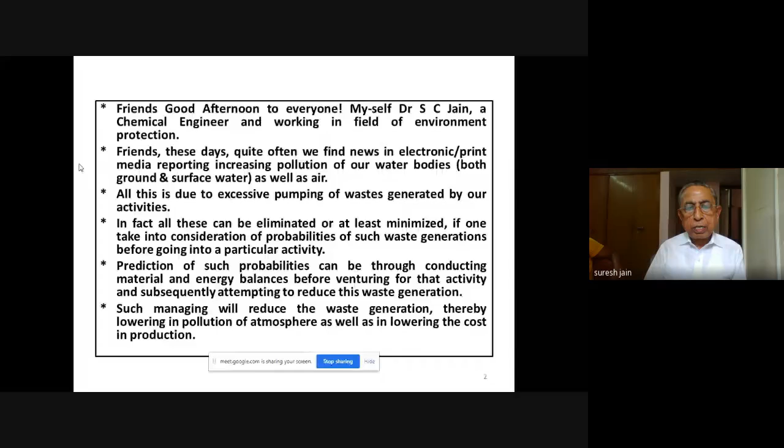Prediction of such probabilities can be done through conducting material and energy balances before venturing into that activity, and subsequently attempting to reduce waste generation. Such management will reduce waste generation, thereby lowering pollution of the atmosphere as well as lowering the cost of production.

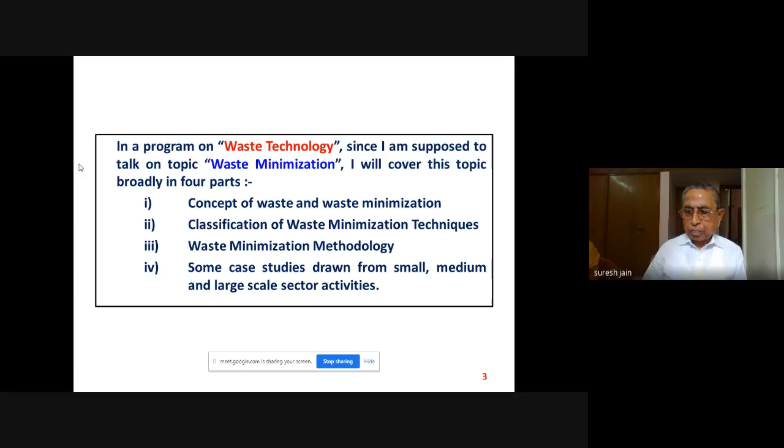In this program on waste technology, since I am supposed to talk on the topic of waste minimization, I will cover this topic broadly in 4 parts. First, I will brief you about the concept of waste and waste minimization. Then we'll discuss the classification of waste minimization techniques, followed by waste minimization methodology. To help you understand what we have discussed, I will discuss some case studies drawn from small, medium, and large scale sector activities. So some case histories I will mention.

Every year, millions of tons of waste is generated from both households and building construction, most of which ends up in landfills, with only a small percentage being recycled. Thus, there is a great need for waste minimization, as this will not only have a huge environmental impact, but also present substantial economic and social benefits.

Waste minimization entails limiting the amount of waste that is generated, thereby helping to eliminate the production of persistent and harmful waste effectively, supporting efforts that promote a sustainable society. So waste minimization involves a change of societal patterns relating to production and consumption, as well as redesigning products to eliminate the generation of waste.

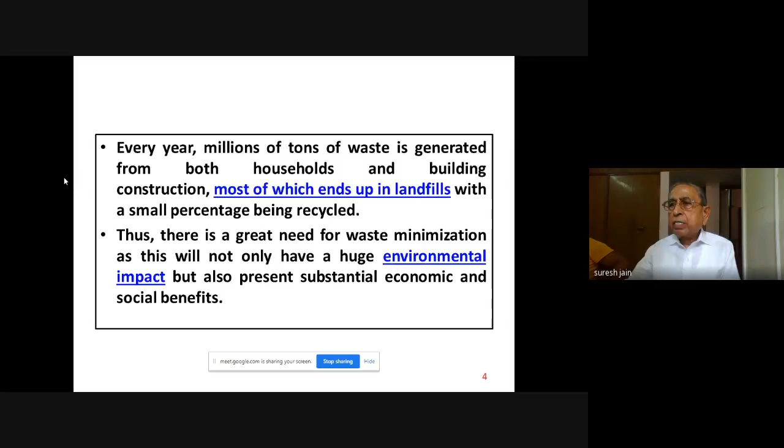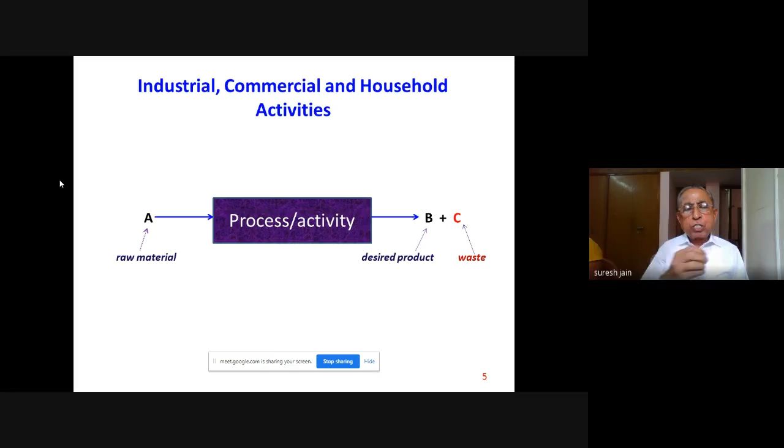Now think of dyeing a cloth - some color comes on your fabric, the remaining goes in a drain. You recover sand gravel from a river bed - some dust comes to your nostril, that is waste. When you burn coal, some smoke comes, that is your waste. Some effluent gases go, they are waste. So waste is something which is going out of this activity - a production activity, construction activity, agriculture activity, whatever activity you think of.

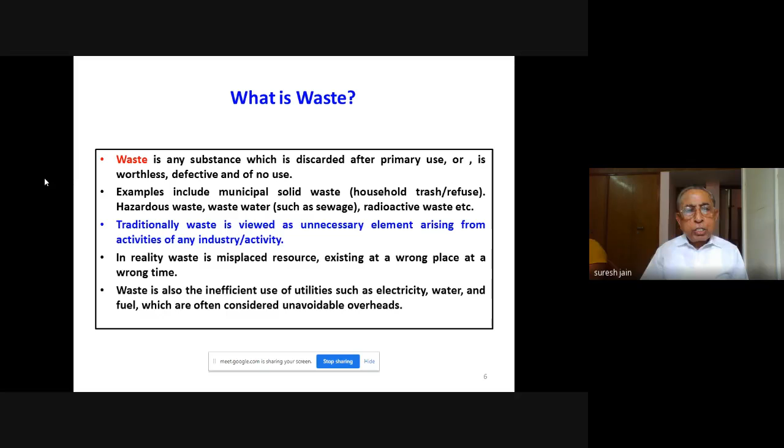Now, what is this waste I am talking about? Waste is any substance which is discarded primarily after prime use, or is worthless, defective, or of no use. This is the dictionary definition of waste. Examples include municipal solid waste, both household trash or refuse, hazardous waste, wastewater like sewage, radioactive waste, etc. There are so many things.

Traditionally, waste is viewed as an unnecessary element arising from the activity of any industry. So in reality, waste is a misplaced resource - I call it gold. Waste is gold which you are wasting. I will explain through case histories how it is gold. In reality, waste is a misplaced resource existing at the wrong place at the wrong time. Waste is also the inefficient use of utilities like electricity, water, fuel, which are often considered unavoidable overheads.

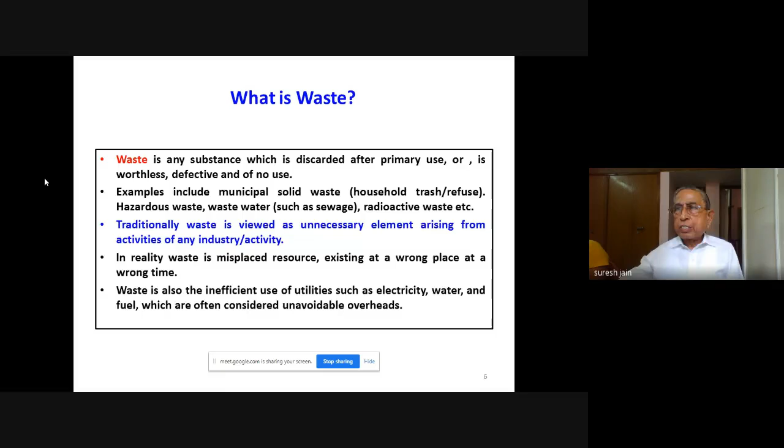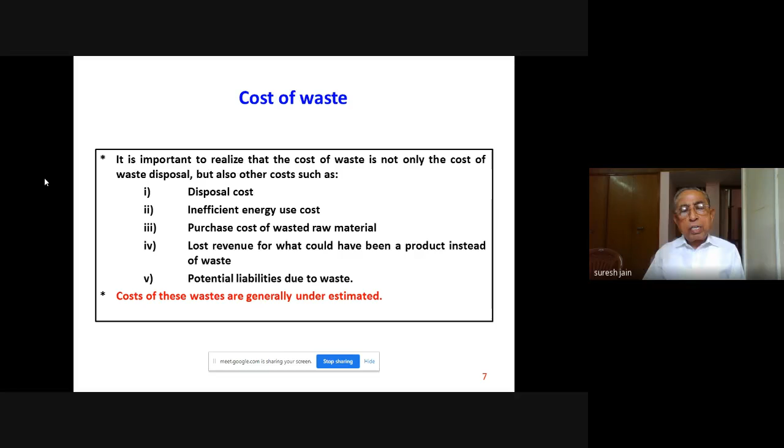So let us think in terms of cost. What is the cost of this waste? It is important to realize that the cost of waste is not only the cost of waste disposal, but also other costs - for example, inefficient energy use cost, purchase cost of the wasted raw material, lost revenue for what could have been a product instead of waste, and potential liabilities due to this waste. These all translate into money it costs. So the cost of this waste is generally underestimated in our projects, but it is too much.

So having said what is this waste, now I come to the second step. What do you mean by waste minimization? Waste minimization is a set of processes and practices intended to reduce the amount of waste produced. By reducing or eliminating the generation of harmful and persistent waste, waste minimization supports to promote a more sustainable society.

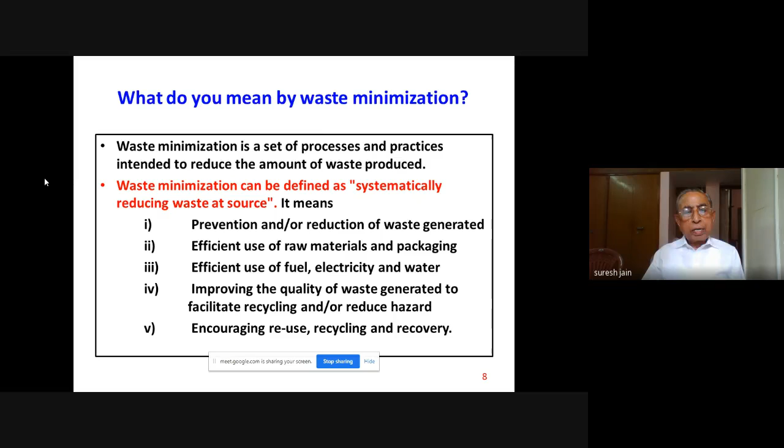Waste minimization can be defined as systematically reducing waste at source. What does it mean? It means prevention and/or reduction of waste generated. Second, efficient use of raw materials and packaging. Third, efficient use of fuel, electricity and water. Improving the quality of waste generated to facilitate recycling and/or reduce the hazards, or encouraging reuse, recycling and recovery.

So waste minimization, friends, for different persons, different terminologies exist in the technical world. This is also known by some other terms, like waste reduction. They say it is a pollution prevention technique, so commonly called pollution prevention. Or source reduction. And some even think that it is an indirect form of cleaner technology, so use of cleaner technology can also be there in waste minimization.

It makes use of managerial and/or technical intervention to make industrial operations inherently pollution free. It should also be clearly understood that waste minimization, however attractive it may be, is not a panacea for all environmental problems and may have to be supported by conventional treatment or disposal solutions we call ETPs.

Waste minimization is best practiced by reducing the generation of waste at the source itself. After exhausting the source reduction opportunities, attempts should be made to recycle the waste within the unit. And finally, modification or reformulation of products so as to manufacture them with least waste generation should be considered. That should be the last resort.

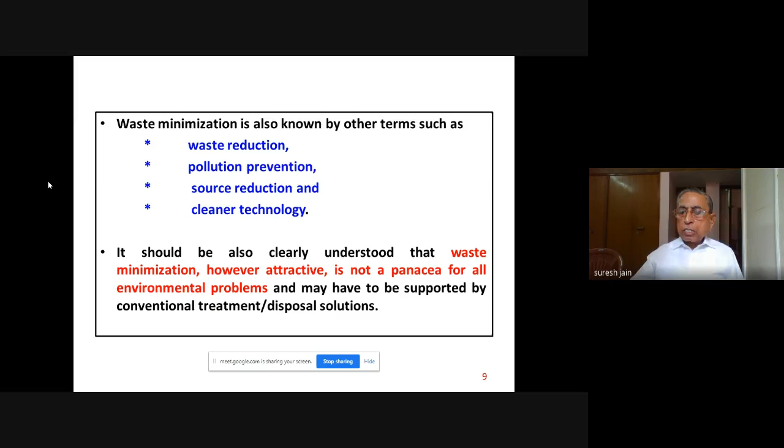So while it is obvious that waste minimization supports sound business and economic practice, in addition to protecting the environment, other benefits include improved product quality. Friends, new technological practices and innovations will not only reduce generation of waste, but also contribute to improved input quality that translates to improved products. The second is economic benefits. Efficiency in product use translates to reduced costs when purchasing materials, thus significantly affecting the financial performance.

Then efficiency of production practices. Waste minimization will attain more output of the product for every part of raw material. That is efficiency. Environmental responsibility: eliminating or minimizing generation of waste will make it easy for you to achieve environmental policies, standards, and regulations. And lastly is the public image. Embracing waste minimization will boost the reputation of your company, as it is a reflection of proactive movement in the quest of protection of environment.

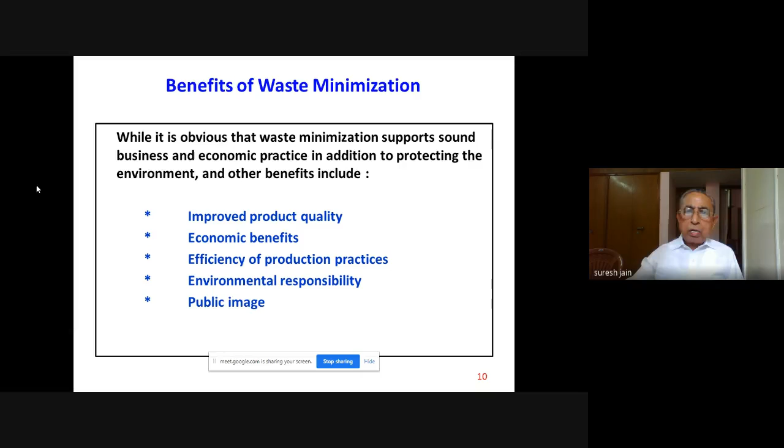Now, are the benefits clear? I hope they must be. Now we come to some examples of waste and possible resources. Just a few I have mentioned; there are hundreds of them available. First is typical fly ash from power plant. That is a waste from power plant, but it is a raw material for cement or brick manufacture. So, the waste of one is the raw source of another.

Second example I take is bagasse waste from sugar manufacturing. जब जूस निकाल लेते हैं, the bagasse. So it can be used as a fuel in the boiler, or it can be used for paper making. Similarly, carbon dioxide released from fertilizers like ammonia is used for manufacturing another type of fertilizer, urea.

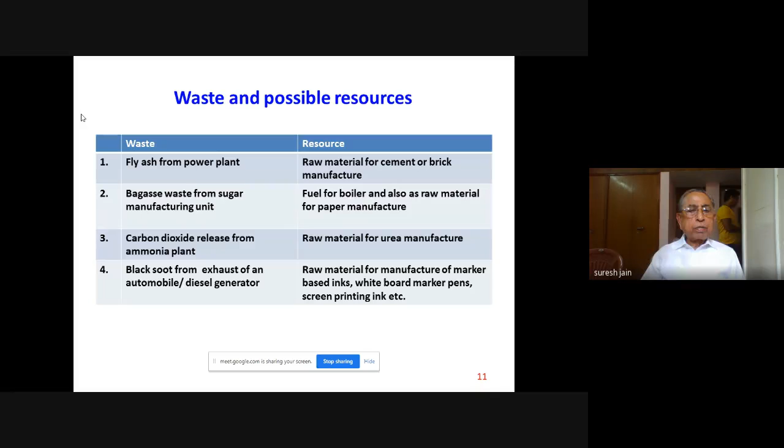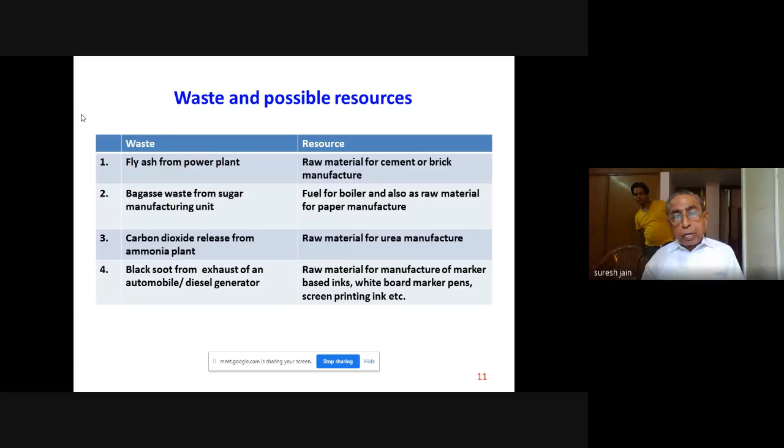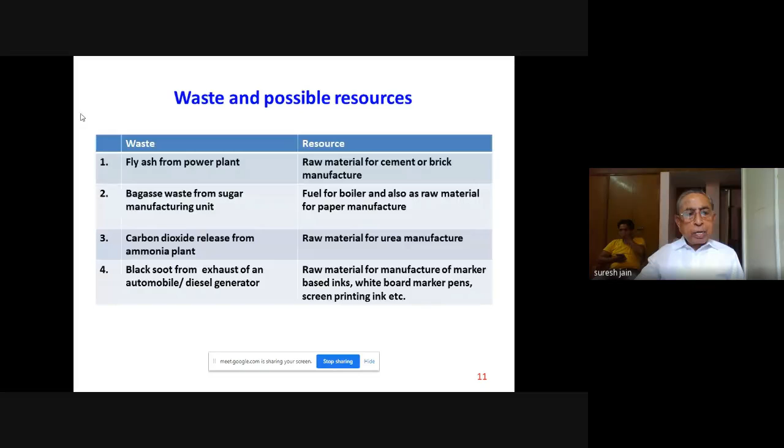Even, friends, your black soot from exhaust of automobiles and diesel generators, as I will show in one of the case histories, becomes a raw material for manufacture of inks: whiteboard marker pens, screen printing inks, etc. So you capture this soot from the exhaust of automobiles, and already under Atmanirbhar Bharat, a startup has started at Bangalore.

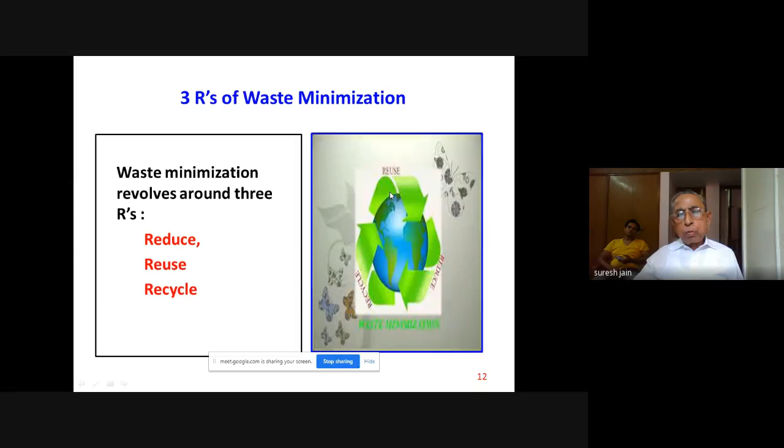Now we come to the 3 R's of waste minimization. Here you can see, first you attempt to reduce, then you reuse, and then recycle. So this is a cyclic order. Now reduce. This calls for using resources that are just enough to cater to your needs. For instance, building a smaller house. This is an effective way of conserving resources, as it also lowers the cost.

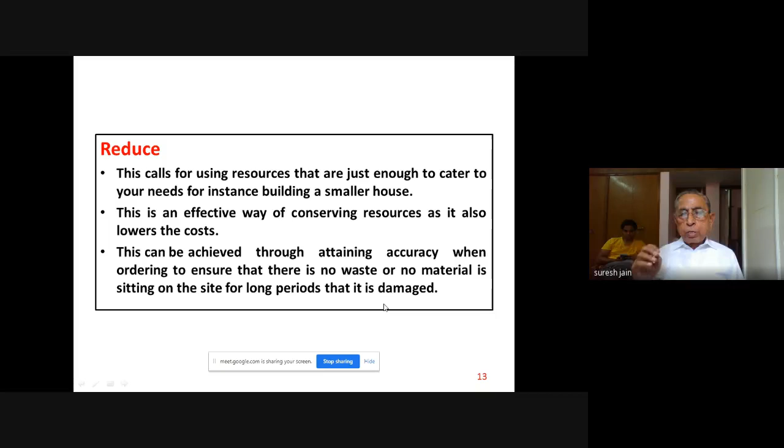It can be achieved through attaining accuracy when ordering to ensure that there is no waste and no material is sitting on the site long enough to get damaged. So, utna hi order karenge which can be used. It should not be dumped. Next is reuse. Here you will do well to reuse existing materials and buildings effectively, reducing the need for resources while lowering waste volumes and saving money.

And lastly, recycle. It is advisable to use materials that are recyclable, as this creates a market for the resources that are recycled, while also raising the price that recyclers pay for the resources that are recovered, even as the recycling viability increases.

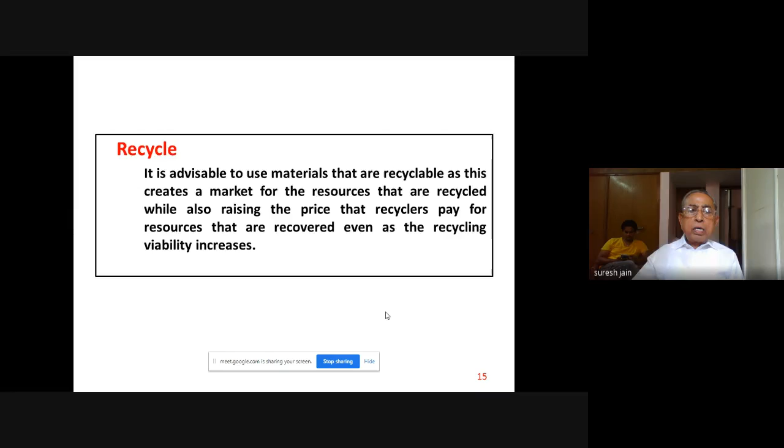The second is recycling, which can be of two types: on-site recovery and reuse, and creation of useful products from byproducts. So this is your second. And last, of course, is product modification.

So when we talk of, let us say, good housekeeping, what do we mean by good housekeeping? Systems to prevent leakages and spillage through preventive maintenance schedules and routine equipment inspections. So prevention of leakage and spillage is the first attempt. Second, improvement to work practice and proper maintenance can produce significant benefits. Well-written working instructions, supervision, awareness, and regular training of the workforce would facilitate good housekeeping. Friends, all these options are typically low cost.

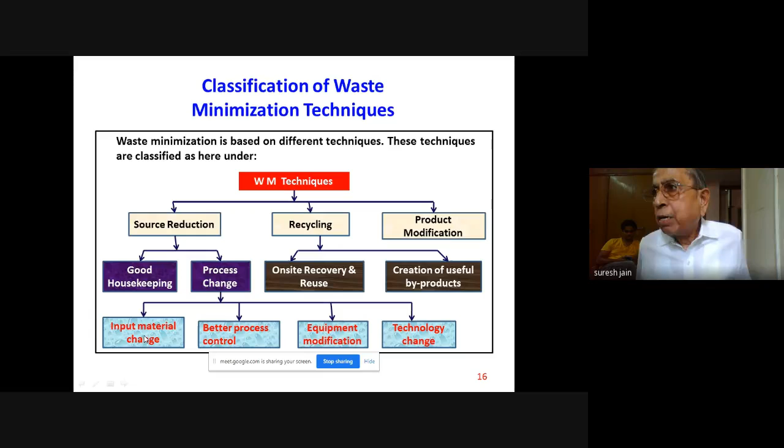Then we come to the process change. Under this, there are four waste minimization techniques. The first is input material change, meaning substitution of input materials by eco-friendly, non-toxic or less toxic than the existing one, and also renewable, preferably having a longer service time. Second is better process control: modification of working procedures, machine operating instructions, and process record keeping in order to run the processes at higher efficiency and with lower waste generation and emissions.

Then the third is equipment modification. Equipment modification means modification of the existing production equipment and utilities, for instance, by addition of measuring and controlling devices in order to run the process at a higher efficiency and lower waste and emission generation rates. And last is technology change: replacement of technology, processing sequence and/or synthesis route in order to minimize waste and emissions generation during production.

Then we come to the second one, recycling. Recycling, as I said, first is on-site recovery and reuse: reuse of wasted materials in the same process or another useful application within the industry. So it is reuse on site. Whereas it can be creation of a useful byproduct. You modify the waste generation process in order to transform the wasted material into a material that can be reused or recycled for another application within or outside the company.

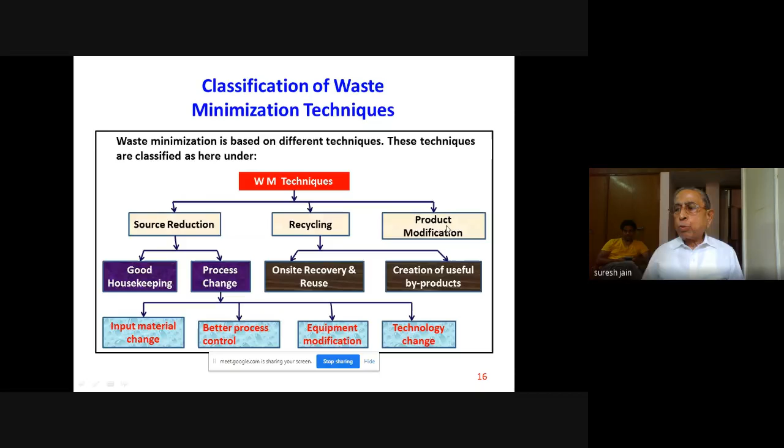And of course, the last is product modification. The characteristics of a product can be modified to minimize the environmental impacts of its production or those of the product itself during or after its use, that is, disposal. Now, friends, that was classification.

Now comes the methodology, how we do it. For an effective waste minimization program, it is essential to bring together various groups in the industry or activity to ensure implementation. How to formalize the program depends upon the size and composition of the industry and its waste and emission problems. The program should be flexible enough so that it can adapt itself to changing circumstances. A methodological step-by-step procedure ensures exploitation of maximum waste minimization opportunities.

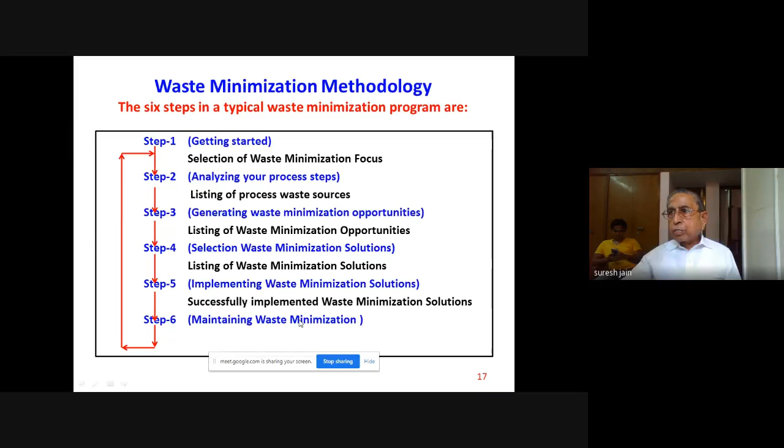Then you select the waste minimization solutions and list them. Then implementing the waste minimization solutions successfully. And finally, maintaining the waste minimization. That is for one stream. There may be different streams in the industry for minimization, so you repeat these steps again. So now let us say step 1, getting started. How do we do it? It involves 3 tasks.

First, you make the waste minimization team. Then you list the process steps, all unit operations, just listing what the sequence is. Identify and select the wasteful process steps. I will explain these steps in a case history, so you will get the feel. First, you know these steps.

The second step is analyzing your process steps. This involves 4 tasks. First, you prepare the process flow chart. Make a material and energy balance. Assign cost to the waste streams. Review the process to identify waste, and so on.

So friends, when we talk of making a waste minimization team: the waste minimization concept encompasses all departments and sections of the industry. So this team involves people from all sections of that activity. Activities involved in a waste minimization audit require assistance and cooperation not only from personnel belonging to the concerned department, but also from other related departments. Hence, making an interdisciplinary and interdepartmental team is a prerequisite for successful conduct of a waste minimization audit.

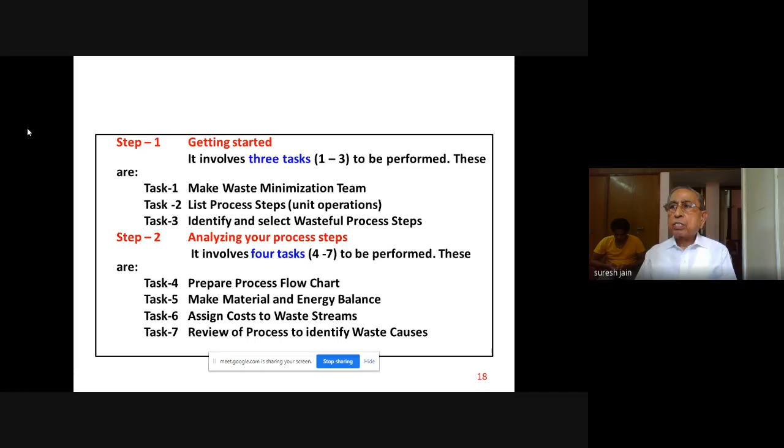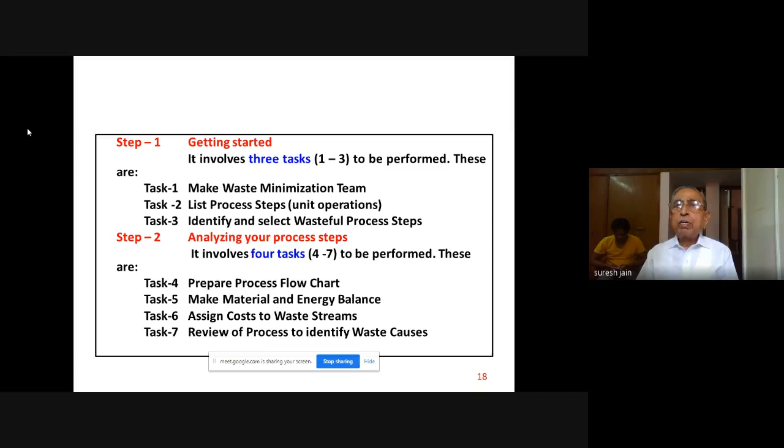Then the seventh task was a review of the process to identify waste causes. Through the material and energy balances, it is possible to carry out a cause analysis to locate and pinpoint the causes of waste generation. These causes would subsequently become the tools for evolving waste minimization measures. I already told you that there could be a wide variety of causes for waste generation, ranging from simple lapses of housekeeping to complex technological reasons.

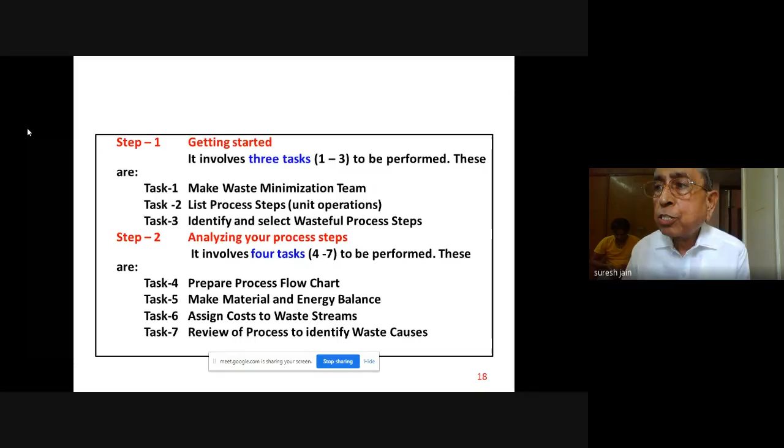The process of finding waste minimization opportunities should take place in an environment which stimulates creativity and independent thinking. It would be beneficial to move away from the routine working environment for better results. Don't stick to the conventional rules. Various analysis tools and techniques like brainstorming and group discussions would be helpful in this step.

And then you have to select the workable opportunity. The waste minimization opportunities developed should be screened, and those which are impractical should be discarded immediately. The discarding process should be simple and straightforward and may often be only qualitative. There is no quantitative way, only quality. There should be no ambiguity. There should be no bias. Unnecessary effort in doing detailed feasibility analysis of impracticable and non-feasible opportunities should be avoided. The remaining waste minimization opportunities are then subjected to a more detailed feasibility analysis.

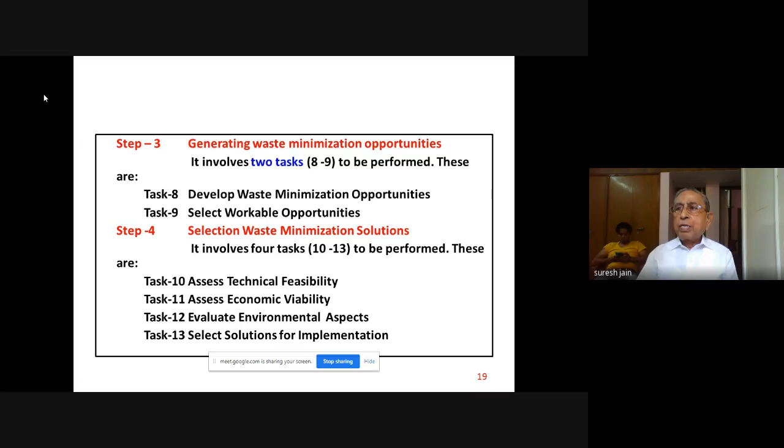Then, having technical, economic, and environmental, we have to select which should be made for implementation. After technical, economic, and environmental assessment, waste minimization measures should be selected for implementation. Understandably, the most attractive ones would be those having best financial benefits provided technical feasibility is favorable. However, in a growing number of cases, it has been found, especially when active public pressure groups are present, that environmental priorities may become the final deciding factor. The work done so far has to be documented. And this document then becomes a reference document for all your approvals, discussions for finances, etc.

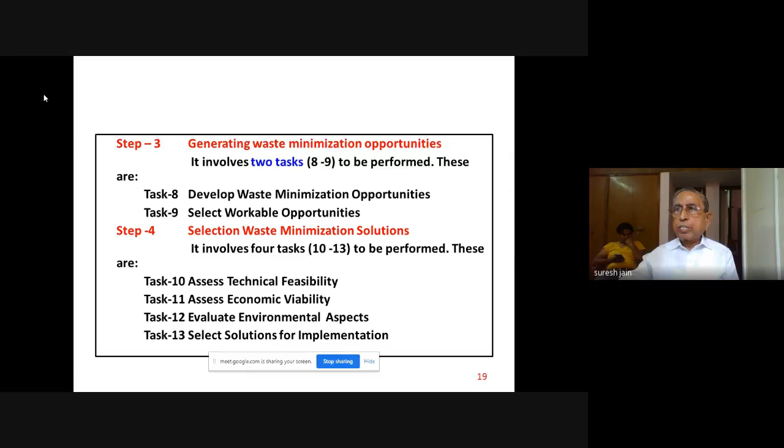Then implementing the waste minimization solutions, here you have to prepare yourself for implementation. The selected solutions could be taken for implementation. Apart from simple housekeeping measures, several others would require a systematic plan for implementation. The waste minimization team should be well prepared to take up the job of implementation. The preparation would include arranging the finances, establishing linkages in case of multi-departmental solutions, technical preparations, and so on. Several factors are there.

Then implement the solutions. The task now comprises layout, drawing preparations, equipment fabrication, procurement, transportation to site, installation, and commissioning. And then monitoring. The waste minimization solution should be monitored for performance. The results obtained should be matched with those estimated during technical evaluation, and causes established for deviation, if there is any. The implementation job is considered to be over only after successful commissioning and sustained stable performance over a reasonable length of time.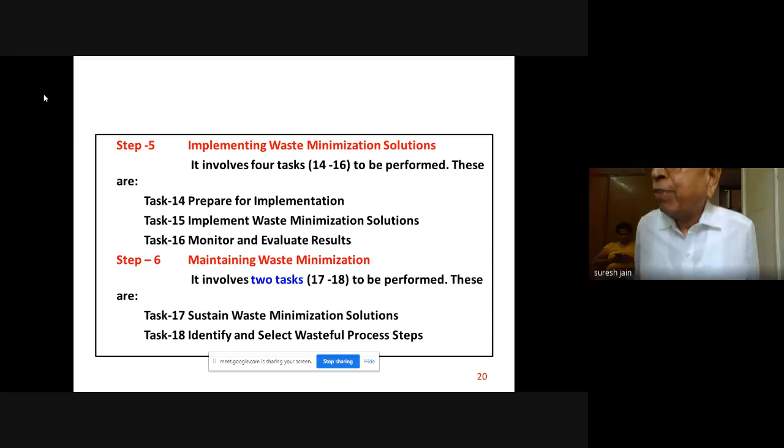Then the last step, sixth step, maintaining the waste minimization. Here the first task is to sustain the waste minimization solutions. The biggest challenge in waste minimization lies in sustaining waste minimization. The enthusiasm of the waste minimization team, many times I have seen, wanes off with time. Such tragic ends should be avoided.

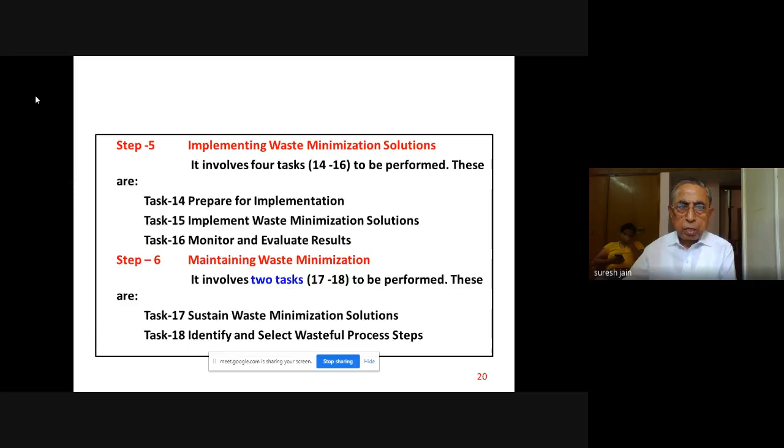Now, identify and select wasteful process steps. That is the last task. Having implemented waste minimization solutions in the area under study, the waste minimization team will go again to step 2 for analyzing the process steps and identifying and selecting another one. So this cycle continues. So friends, in a nutshell, I will say, a philosophy of minimizing the waste must be developed within the company. This means waste minimization should become an integral part of the company's activity. All successful waste minimization programs till date have been founded on this philosophy.

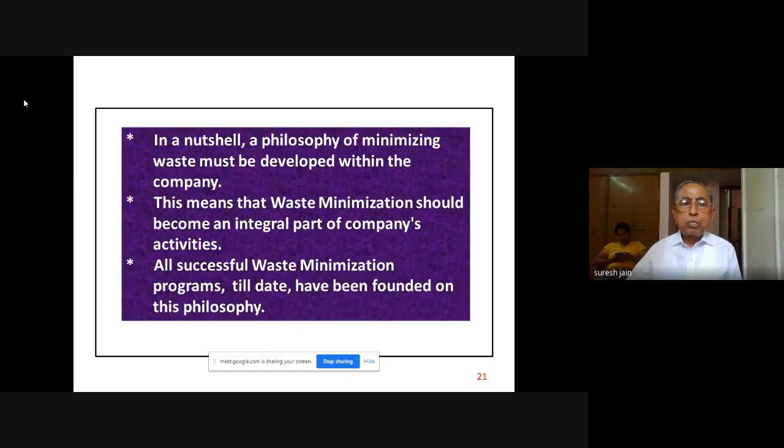So friends, I have discussed classification, methodology and concept. Now I will say some case histories. There are two current concepts of minimizing this waste. It has to be minimized now. One is the process reorientation technique. General process layout management we do, some cost recovery management we do in it. And another is these days, 21st century innovative techniques. And pervaporation and biofiltration are dominating these.

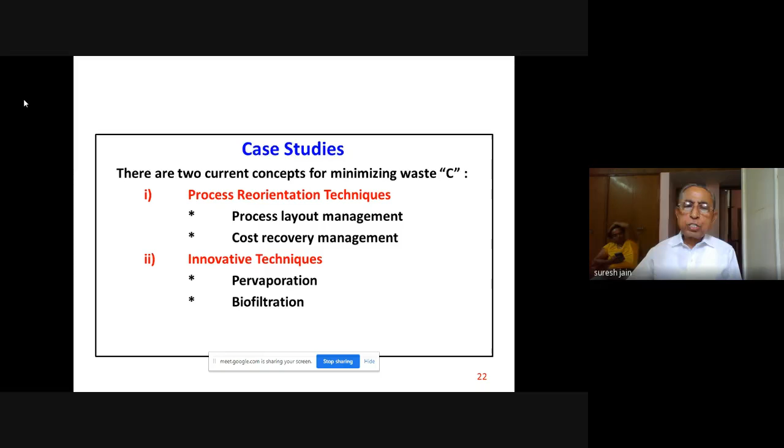I take first a very small industry of electroplating. Towns like Ludhiana are full of hundreds of electroplating units whose total assets may be 1 lakh or 2 lakh or 5 lakh or 10 lakh.

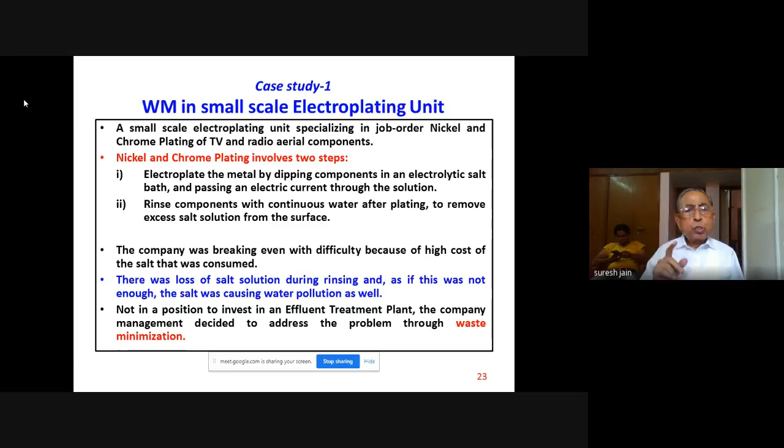One such small scale electroplating unit normally does job order work. You have a particular piece you want plated, so it's a small job. There's an electroplating bath - you put the job in, pass electricity, it gets coated, then washed. Not much technical here, so first I'm taking this unit to see how waste minimization is good. TV and radio components need parts that are nickel or chrome plated, so you electroplate by dipping the component in an electrolytic salt bath and passing electric current. After plating, you rinse the component with continuous water to remove excess salt from the surface. That's the routine going on.

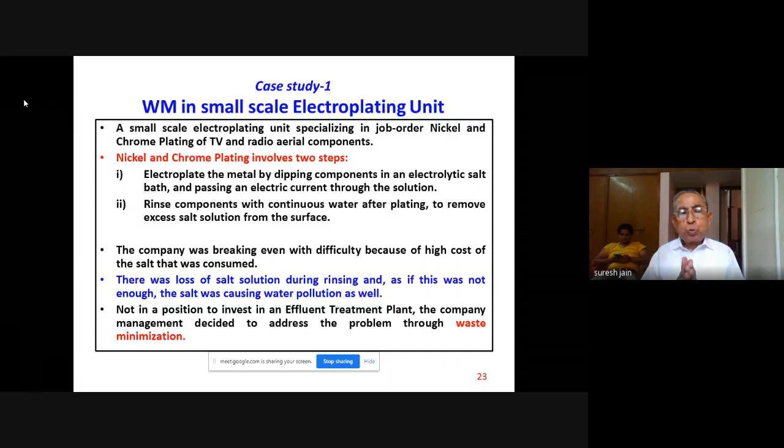Now what happened? The cost of the salt has gone high, and the excess salt being drained has to be treated as per pollution control laws. But the treatment plant may cost a lakh or two, where the whole industry is worth only a lakh or two. So the company was breaking even with difficulty because of this high cost of salt, and there was loss of salt solution during rinsing. As if this wasn't enough, the salt was causing water pollution. Not in a position to invest in an effluent treatment plant, the company management decided to address the problem through waste minimization. These are the case histories our students normally do.

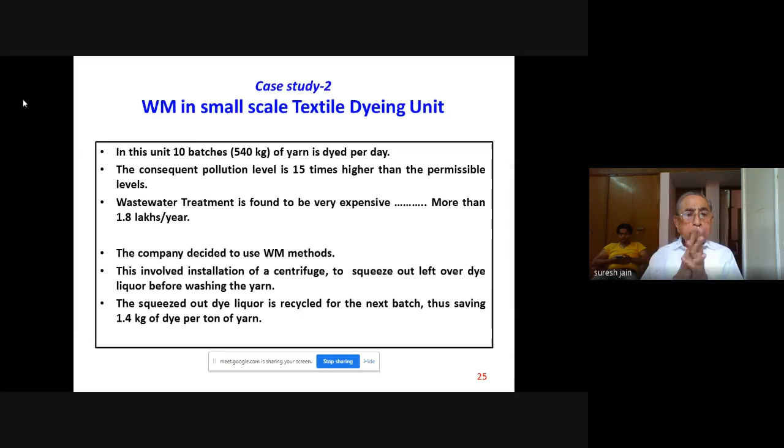I take another example, near Ludhiana, in textile units. There are small textile units which do only dyeing, for example. This factory dyed around 540 kg of yarn per day, and that dyed colored water going into the drain was 15 times higher than the permissible level set by the pollution control board. If you treat that, it's very expensive - you need 1.8 lakh per year even for treatment at that stage, other than the treatment plant itself. So the company decided to use a waste minimization method, which involved installation of a centrifuge.

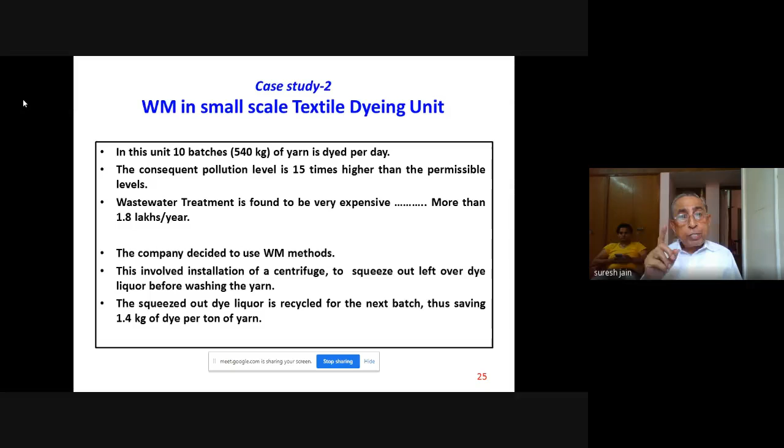This centrifuge squeezes out the leftover dye. The squeezed-out dye liquor is recycled for the next batch and can be reused. So there was a saving of 1.4 kg of dye per ton of yarn, and dyes are very costly. What were the benefits? Pollution load in terms of COD got reduced to 4.8 kg per ton. Washing cycles for the centrifuged yarn were reduced - earlier they washed 4 times, now only 3. Even strain on operators was reduced, and environmental cost reduction was achieved. The centrifuge cost only 20,000 rupees, and annual saving was 1 lakh, almost 20% of the annual operating cost. Total time taken was 3 months. So you can see the economic benefit of waste minimization.

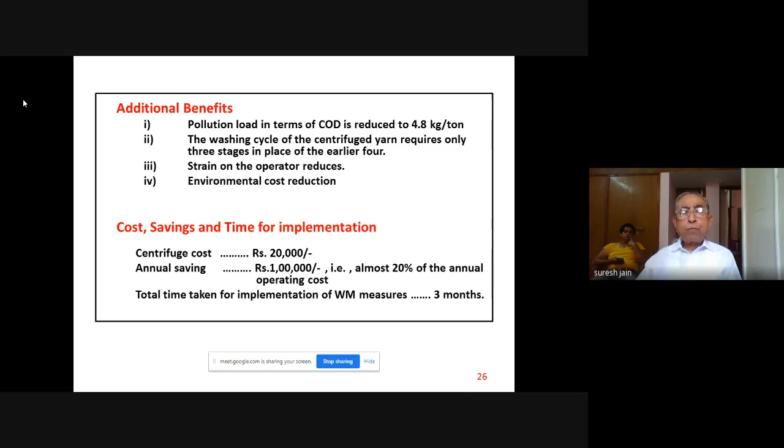Third, I take an example from a small food processing unit, like Nirula's, for example. These food processing units make ice creams, cheese, processed meats, vegetables, etc. This unit was throwing out 40 cubic meters of wastewater with an average BOD of 2300 milligrams per liter, while the board allows only 30 milligrams per liter.

So it has to be an effluent treatment plant. That is one way. But some suggestions for waste minimization were done.

We modified and segregated the first wash of the ice cream vessel. Then segregate and reuse the whey, which is whatever remains after cheese making. And then separation of coarse solids in vegetable and meat processing.

You can see here, this is ice cream making. You add the ingredients, so ice cream is ready. You take the ice cream and then clean this vessel and drain it. This is the normal routine.

So what we did was, after taking out the ice cream, instead of throwing it away, we salted it, scented it, put some sugars, and made milkshakes. So this is a sellable quantity. Waste is getting minimized, and all this fat etc. has been used in a product. It is to say, modify the product and milkshake being taken.

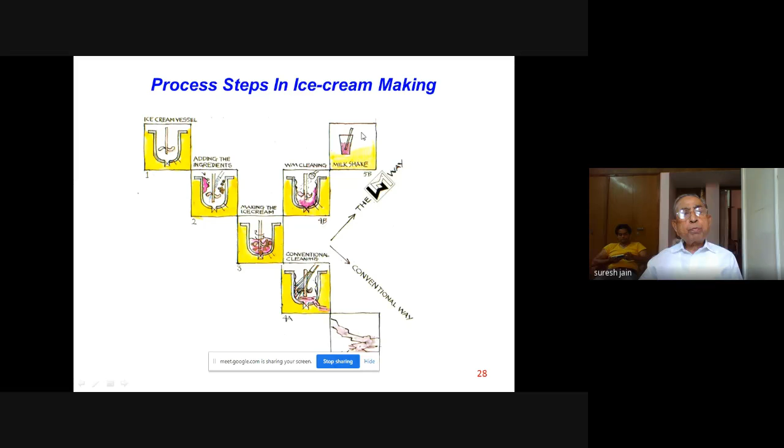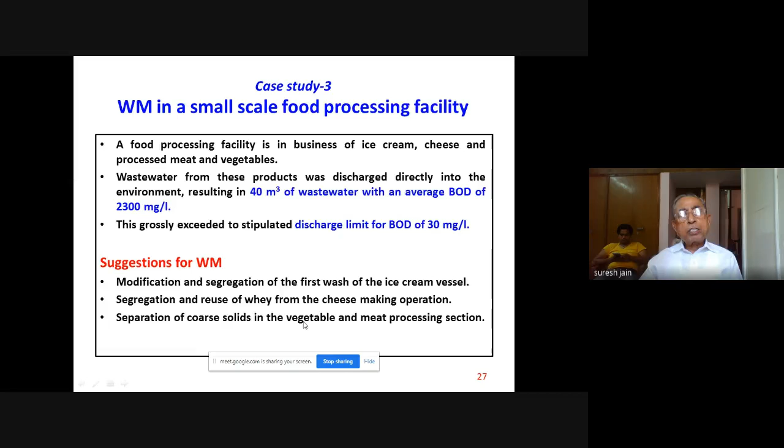So this is the step when we say segregation of the first wash of the ice cream vessel. Similarly for the whey, we take it and make this milkshake. Coarse materials are taken separately because otherwise TDS will be higher.

Now see the results. If there is no waste minimization, an effluent treatment plant would require 200 meters square of surface area. The cost was around 7.5 lakh at that time, and operating cost was 2 lakh.

Now this plant is in Delhi, and the land is very costly. But if you apply this waste minimization, the requirement of land is half. So it's half the investment and half the operating cost. That is the advantage of waste minimization.

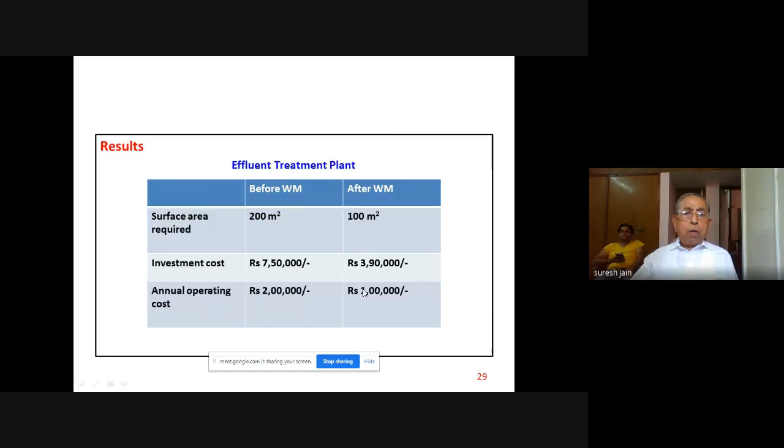Still other examples, these are all small scale, medium scale industries. This is the potato chips everybody is taking. It's a very, say, crisp manufacturing process.

1500 kilograms per hour of natural raw potatoes are processed to produce 350 kilograms per hour of these chips. There were 15 employees permanent and 40 temporary.

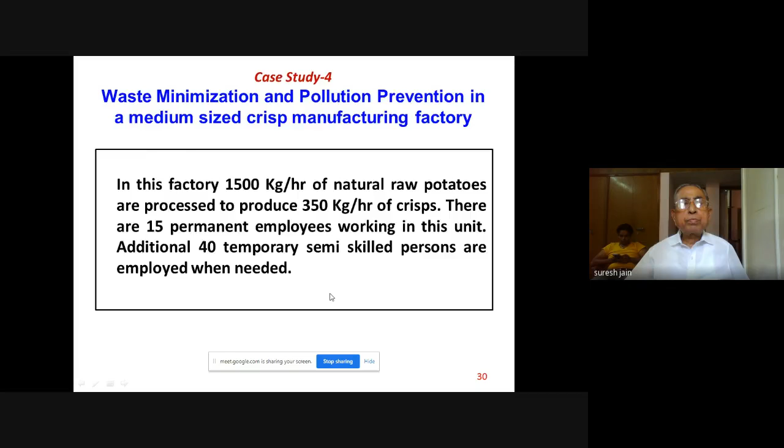So what you do in your normal home when you make chips: you peel the potatoes, you wash them, you peel them, you slice them, and you cook them. The same way here: first they are washed, then peeled, then soaked, sliced, and then cooked. So this is the original process.

So here I had shown material balance. 1500 kilograms of raw material are washed with 2 cubic meters per hour of water. So the whole water will go as drainage. At present it was going that way.

Similarly, peeling will give some pulp. Now in soaking, hot water is used. In slicing and soaking, hot water is used and this whole thing goes as drain. And in cooking, the hot oil will go as waste and some air emissions will also be there.

So reasons for action and environmental concern: for a productive process, there was high consumption of water and generation of wastewater that could be reduced. On the other hand, some waste products such as oil and starch could be recovered to be sold to other industries. So here, this pulp, starch and oil can be sold to other industry.

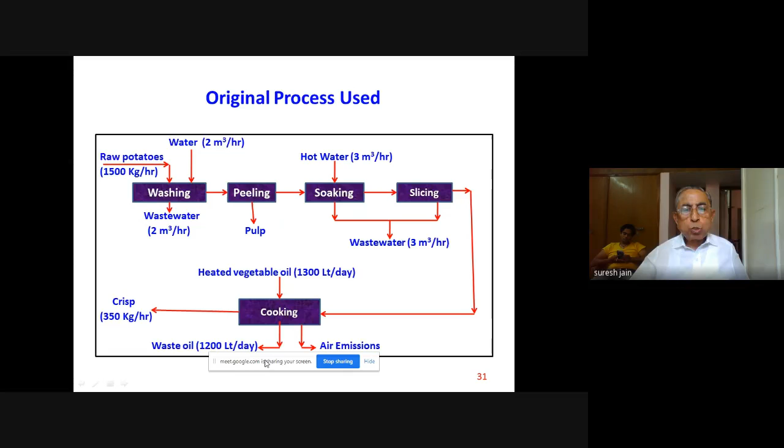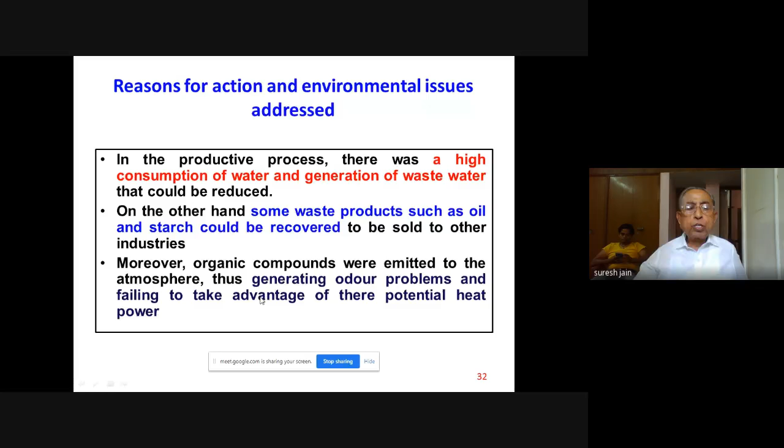Moreover, organic compounds are emitted to the atmosphere generating odor and failing to take advantage of their potential heat. So fumes are coming out, they are hot also and odorous in character.

So the aspects identified to be improved are non-recycling of water during all productive processes. They were not recycling, especially during washing. This implied a higher consumption of water as well as a bigger generation of wastewater.

The emissions from the cooking unit carried organic compounds. They are not treated but directly evacuated to the atmosphere. Not only a problem of odor and air pollution, but also a loss of energy.

And some products generated during the process, such as oil from the cooking unit and starch, are managed as waste products instead of taking advantage of their potential use in other industries.

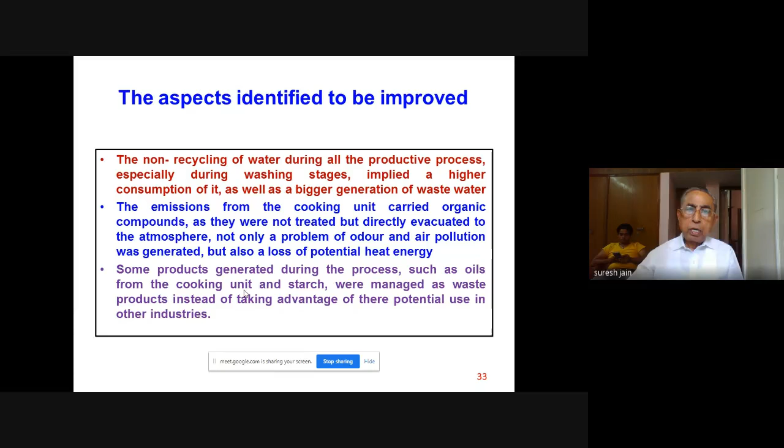So we took some actions - pollution prevention actions, or waste minimization actions, you can say.

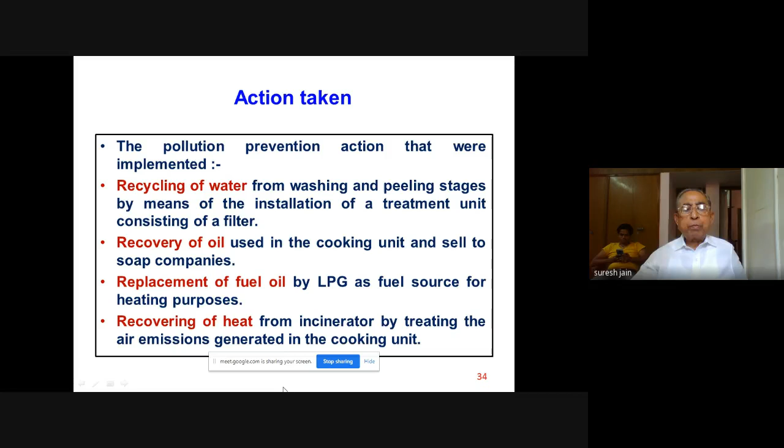Recycling of water from the washing and peeling by means of installation of a treatment unit with simple filters. Recovery of oil used in the cooking unit and selling it to soap industries. Replacement of fuel oil by LPG as a fuel source for heating. And recovery of heat from an incinerator by treating air emissions generated in the cooking unit.

So this water gets treated and comes back recycled. So wastewater generation has been practically reduced to nil.

Now after this, go to the soaking. In soaking, hot water is there. In slicing, wastewater is there, you treat it, and that can be reused.

Then after slicing comes cooking. In cooking, air fumes are there, so they are treated and exchanged. The water which is needed takes the heat from those chimneys, and this heat is being recovered.

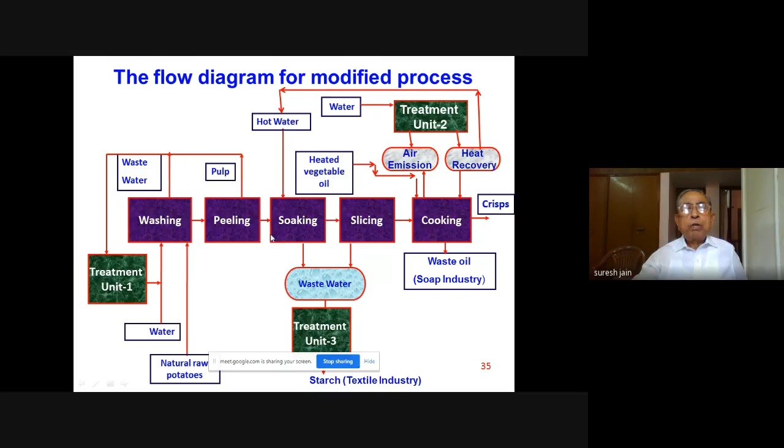So this becomes a flow diagram for this modified process. Small treatment units have been brought in. See the results: reduction in water consumption, reduction of wastewater generation, savings are there.

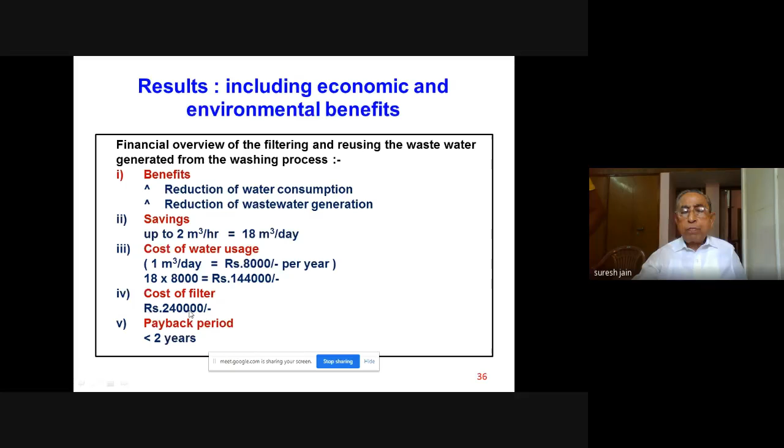Even recycling of water from the soaking and slicing process after previous treatment is most important, because water is also scarce. Recovery of starch was there, environmental benefits are there, reduction of energy consumption was there, and better management of products or waste products is there.

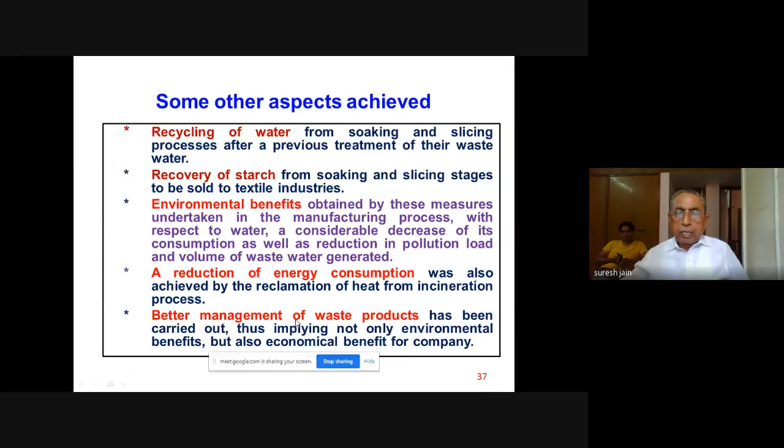Then I take a simple dairy plant example, like a plant in Punjab, very common. This describes a cleaner production initiative for wastewater minimization in a dairy plant. In addition to pasteurized milk, the dairy produces cheese, butter, curd, and ice creams.

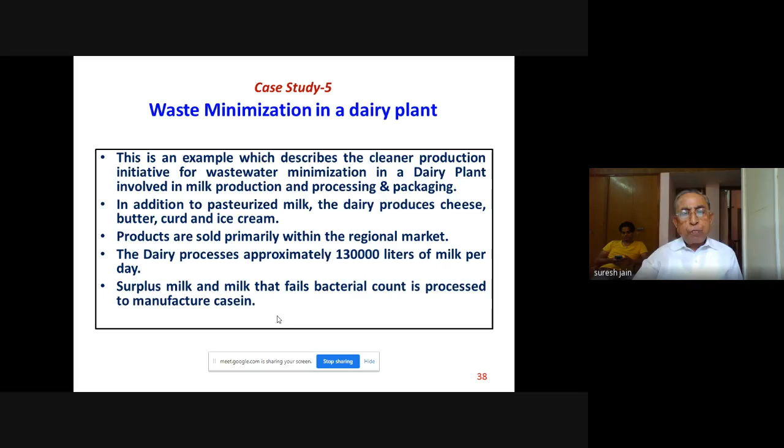130,000 liters of milk per day this Verka plant is making. They get milk in tankers, and if it fails quality checks, they make casein from that milk.

Normally what they do is wash the tanker with hot and cold water. Even the floor they wash with that, and their hose pipes, open pipes, they wash with their hand fingers. Lot of wastage of water was there.

So here we brought in cleaner production measures. During the waste minimization project, methods of reducing water use were investigated.

So what we simply did: high pressure washers were purchased and connected directly to the water supply line. Open-ended hoses were replaced with shut-off spray nozzles. That is the only thing we did.

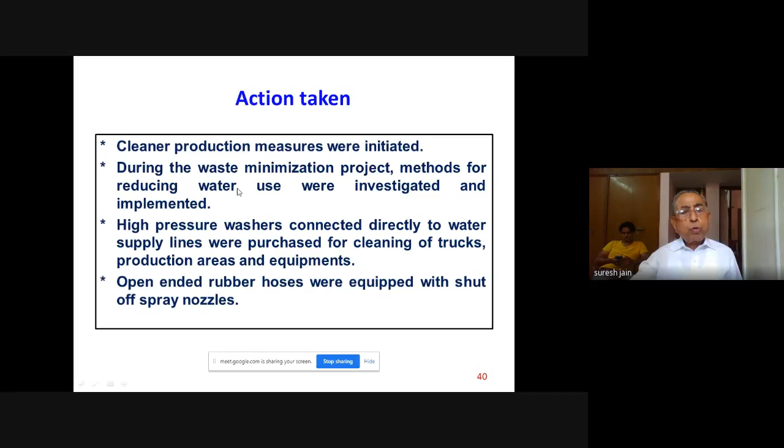And the result was water consumption was reduced to 30,000 cubic meters per year, and wastewater discharge was also reduced by the same amount. Cost of the equipment was just 3 lakh, and yearly saving is 4.5 lakh.

This is the plant, this local Verka plant, and now they are using this waste minimization technique.

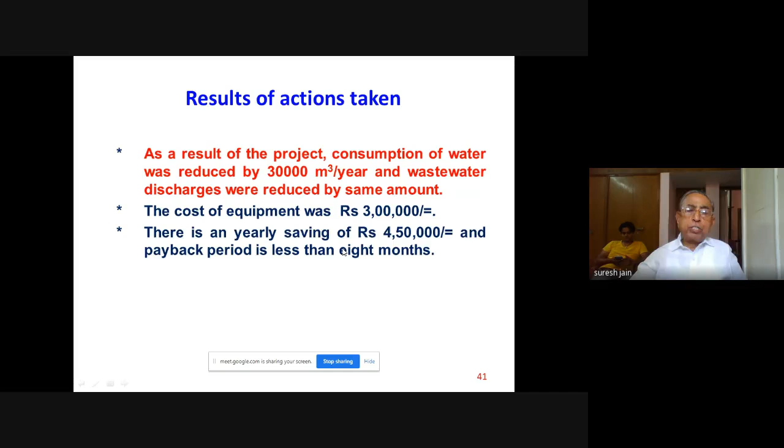Friends, now I'm just driving. You must have seen on road tankers of petrol and diesel going on. They are coming to your petrol stations from refineries. Do you know how they are filled? You can't put petrol in the tank as is, it will catch fire.

So they first fill with water, then put petrol or diesel from the top, and take the water out. On an average, 5,000 kiloliters per day is the discharged water. Now this water, howsoever we say petrol or diesel is not miscible with water, some smell will definitely come in that water. So it is a health problem, and it is a real estate problem also at that stage.

So a method has come up now. This is the 21st century preparation. Already they are working, already the refineries have taken care of that. So what they are doing is using a pervaporation technique.

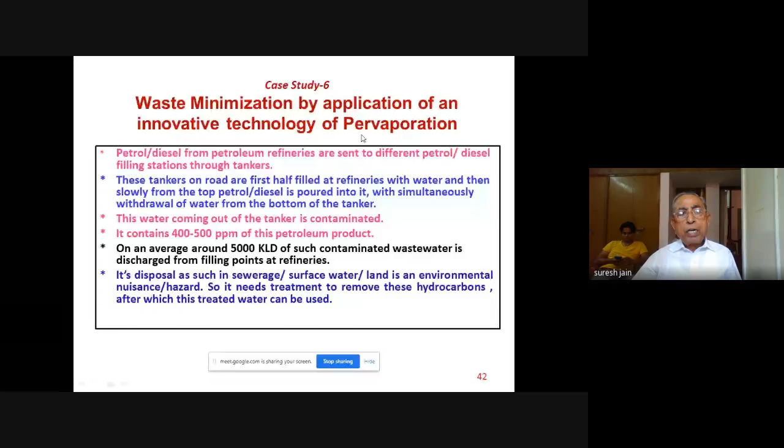In this technique, 100% of petrol or diesel, those 400 or 500 ppm, are taken out. How are they taken out? Let me tell you the mechanism here.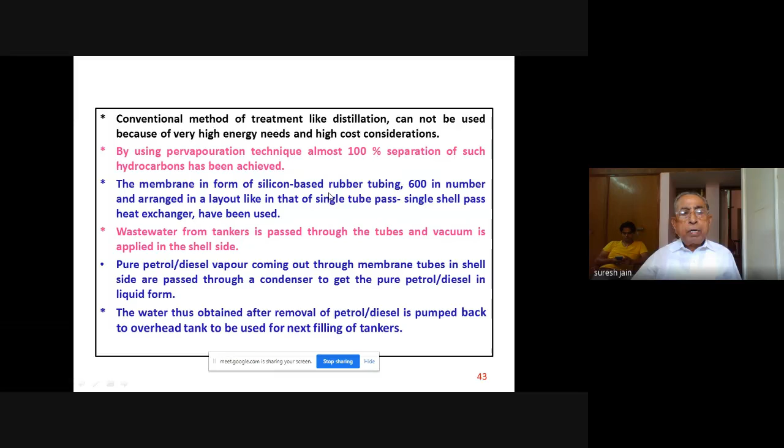The wastewater is passed through a membrane, which we call semi-permeable. Semi means only petrol or diesel can come through, not water, because of the molecular size, and treated water goes through. On this side we apply vacuum, so petrol or diesel will come on this side.

They will be in the form of vapor, get condensed, and you get pure petrol or diesel. So selective sorption into the membrane, selective diffusion through the membrane, desorption in the vapor phase - this is the ideal way, 100% today. So you can see that out of 50,000, say 5,000 kiloliters per day, 90% of that water gets recovered and can be reused. This is what we call waste minimization.

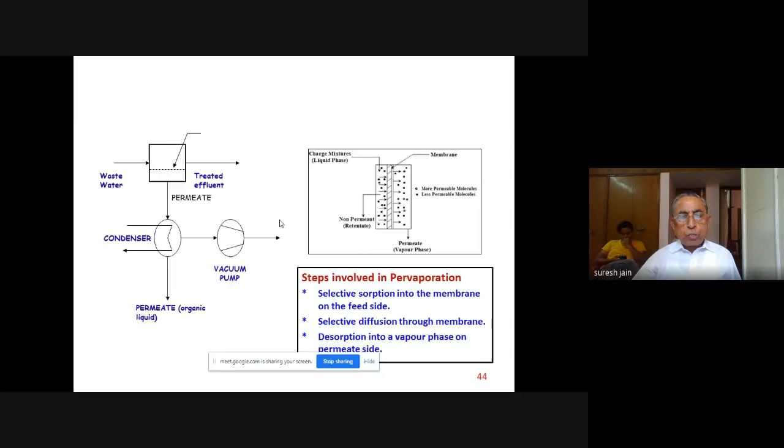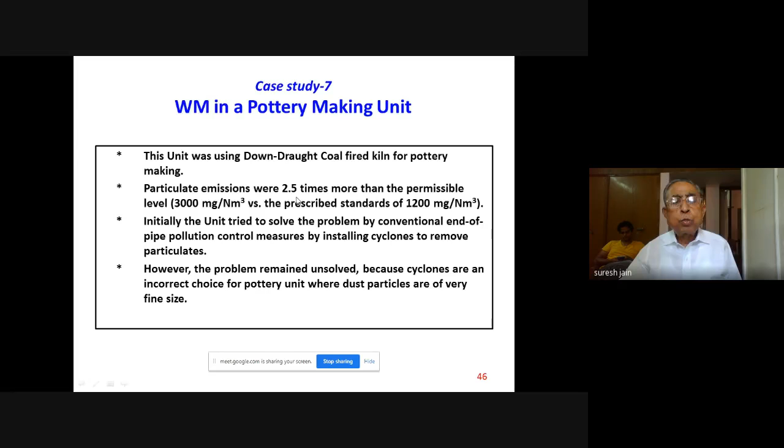Normally we say for suspended particulate matter, a cyclone should be used - in air pollution you might have discussed this somewhere. But friends, cyclones cannot be used in such cases because they depend upon particle size. This pottery unit has a very fine particle size. So they made a mistake - they installed that cyclone, but still they were not getting the desired results.

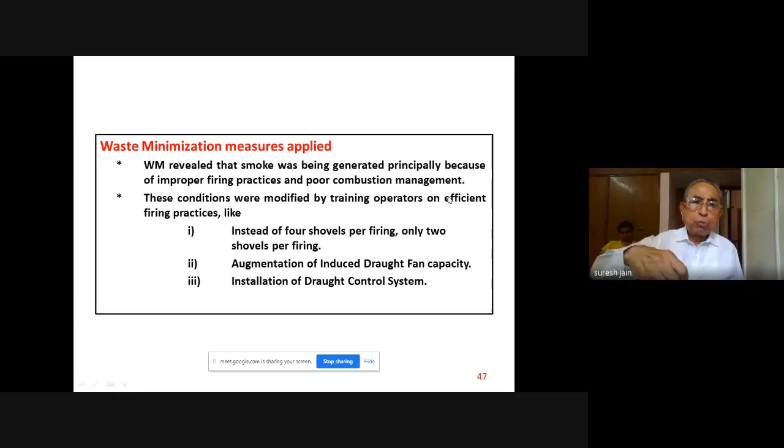So it is now, as I said, improvement inside. Combustion improvement has been made. When you put coal into the furnace, a lot of smoke comes. So we just reduced from 4 times putting to 2 times and augmented the induced draft. The whole thing reduced the emissions to 1100 milligram per normal cubic meter.

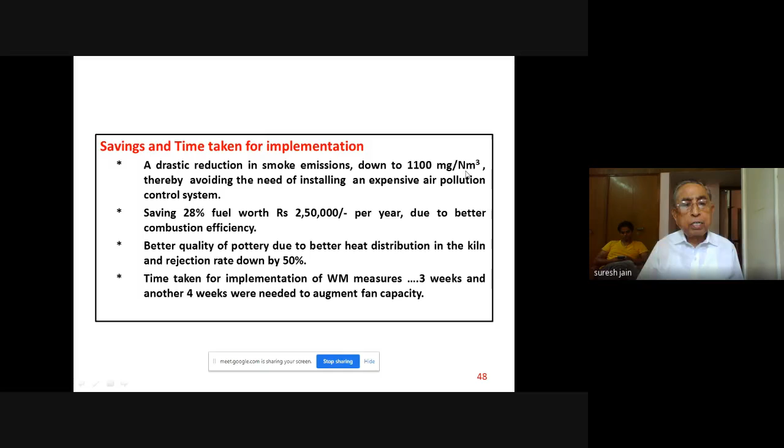There is no need of any cyclone, etc. There was 28% of fuel saving, worth 2.5 lakh per year. 3 weeks were taken and 4 weeks are needed.

And another is, you must have seen on the road, a lot of times, say in thermal plants or in factories, big towers are there, spray towers. Any gas, we say, you scrub it with water. But then water pollution will be there. A lot of water is used and that water problem will be there. So this has to be minimized.

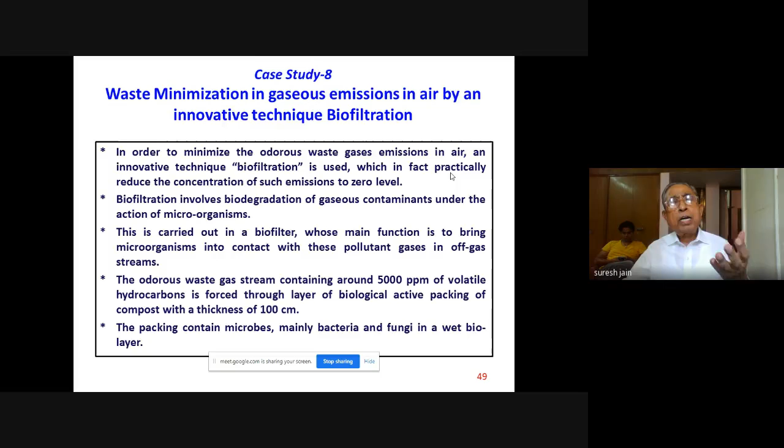Now biotechnology has come into the picture. We pass some of these gases through the microbes, and these microbes consume that and 100% separation takes place. For example, sulfur dioxide or hydrogen sulfide gas, which are common in refineries, are being used by these microbes. So this is just a simple 100 centimeters bed containing the microbe; you pass these contaminants and clean air comes.

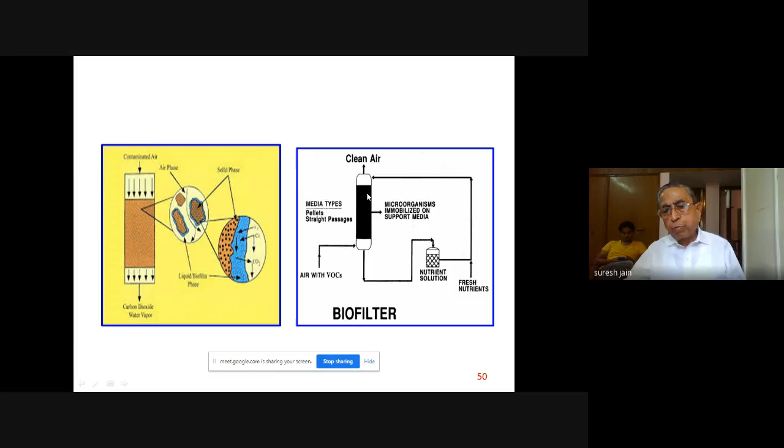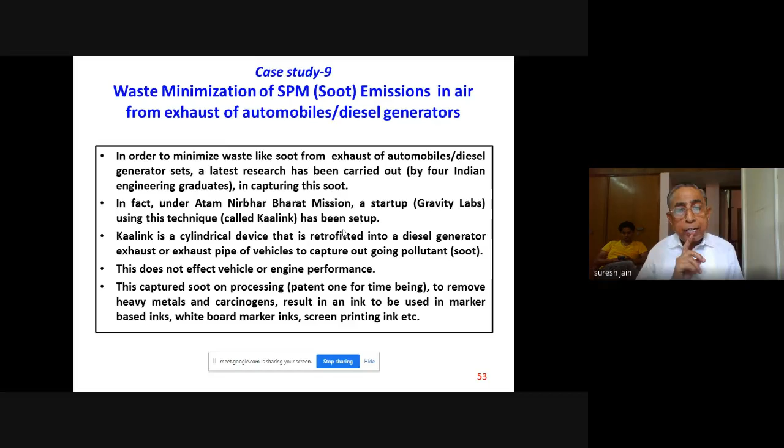The last slide I show is that a lot of smoke or soot comes from automobiles. This is my last slide. In order to minimize waste like soot from the exhaust of automobiles or diesel generating sets, the latest research has been carried out by 4 Indian engineering graduates in capturing this soot. In fact, under the Atmanirbhar Bharat Mission, a startup, Graviky Labs, using this technique called Kaalink has been set up. You can go to Google and search on it.

Kaalink is a cylindrical device that is retrofitted into a diesel generator exhaust or the exhaust pipe of a vehicle to capture this pollutant. This does not affect the vehicle or engine performance. This captured soot, on processing, which at present is patented, removes heavy metals and carcinogens and results in an ink to be used in marker inks, whiteboard marker inks, screen printing inks.

So as I said, this is a startup of the 21st century. This year, they are working. Again, as I said, you go to Google, you will get the complete detail. Of course, it is a patented work, so fine details are not there. So friends, this way work is also going on in waste minimization in air pollution too.

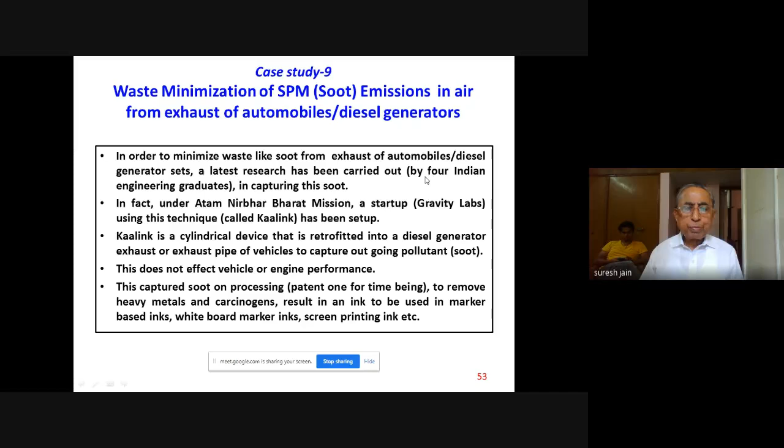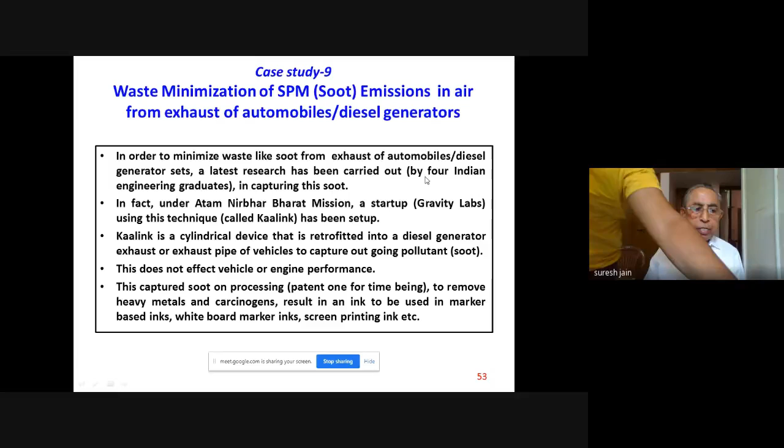Good afternoon, sir. Sir, you explained about waste minimization, and you already explained about best housekeeping. How is it responsible for waste minimization? Housekeeping, in fact, to my mind, when I go to the industry, about 20 to 30% is from leakages: tap leakages, flange leakages, drain leakages, open pipes. You can stop them. That is housekeeping.

Okay, but is this housekeeping only for the industry, or may it be for individual houses also? Even in the house or even in the construction industry, you see, when you are making a mixture of concrete and cement, many times you put in water, and the worker leaves the tap outside open. So housekeeping does not really require any costing. It is the attitude only. But it saves a lot of money.